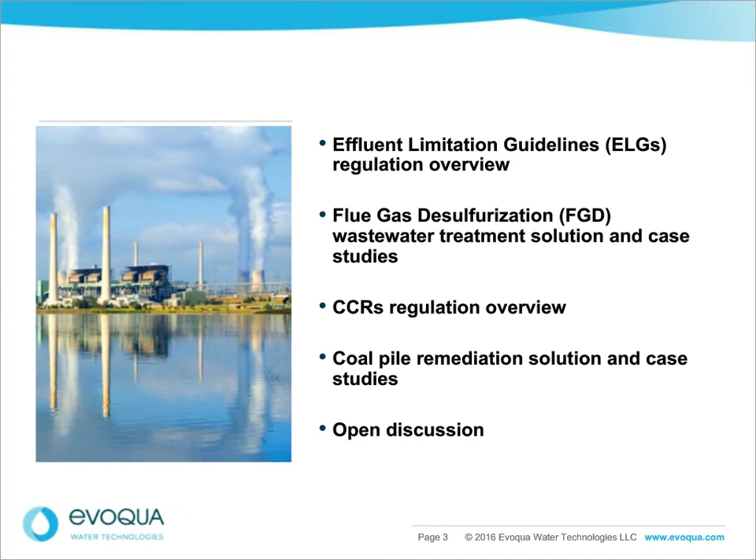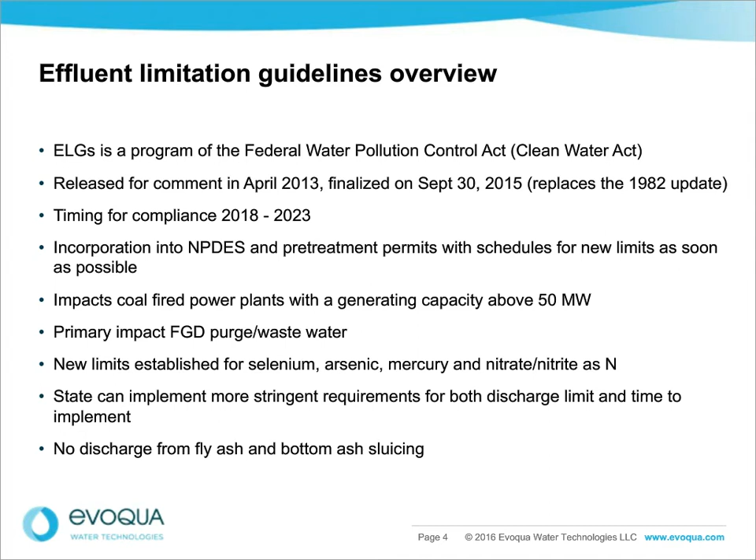The EPA has implemented new regulations for coal-fired power plants designed to reduce the discharge of certain contaminants to the nation's waterways. This 81-page regulation, published in late 2015, addresses 8 different water streams commonly associated with coal handling and coal burning facilities. Sites that have implemented flue gas desulfurization for air pollution compliance will face new restrictions on the scrubber purge or blowdown water, most notably for arsenic, selenium, mercury, and nitrates. Another major change will be the elimination of discharge from ash sluicing operations. This table shows the specific new limits for FGD wastewater.

Per the EPA, these new restrictions are designed to reduce the release of toxic substances to both surface water and municipal treatment facilities. It's worth noting that these are the minimum federal standards, and that state and local restrictions may even be tougher. At the same time as meeting these new limits, power plants will also have to eliminate discharge from fly ash conveyance streams. This will certainly affect the overall plant water balance and create new challenges for water management, water treatment, and operations.

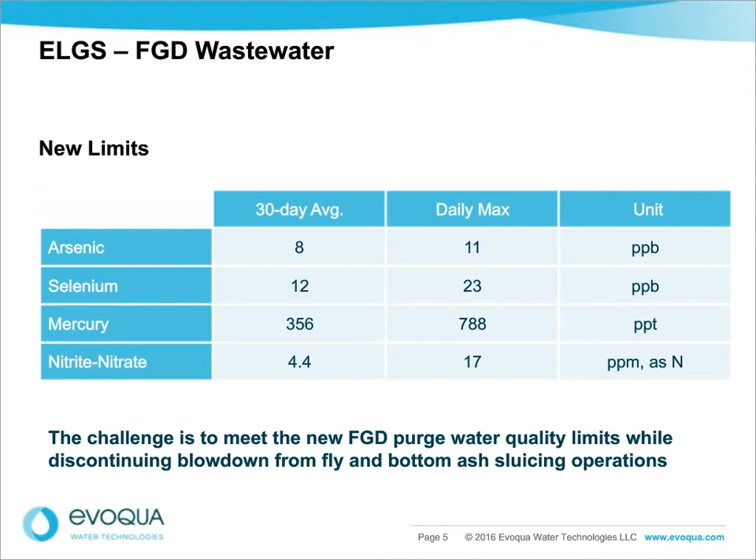The water balance for a coal-fired power plant can be quite complex. This is a simplified drawing of the key waste streams. Mike will discuss the FGD wastewater treatment process in more detail.

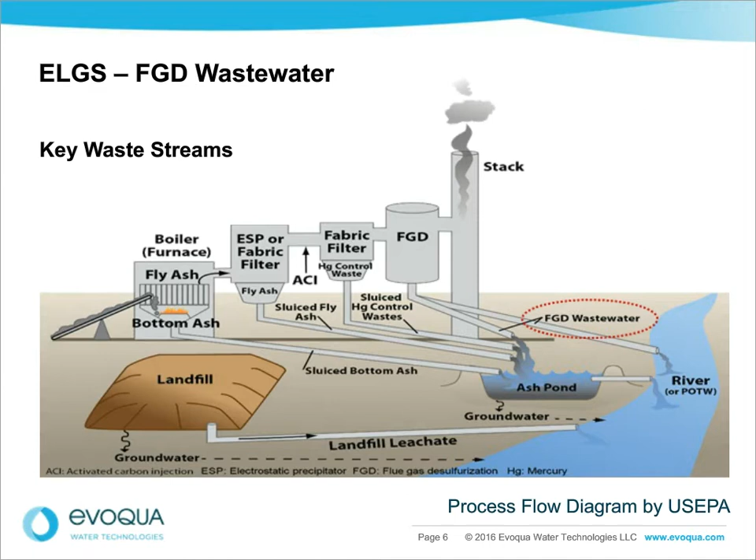Prior to September 30th, where the ELG guidelines came into effect, a typical FGD wastewater treatment plant would primarily consist of a physical chemical treatment process or a settling pond for desaturation of the gypsum and precipitation of some of the heavy metals. However, depending upon the ultimate point of discharge, local NPDES permits may be a little bit more stringent and require total nitrogen reduction or COD, BOD reduction through a secondary treatment process.

Now that we have the ELG regulations in effect, an FGD wastewater treatment plant can and could consist of 3 treatment steps: primary, secondary, and tertiary. The secondary portion for total nitrogen reduction or BOD-COD reduction really plays a part on several factors. Number one is what the NPDES discharge requirements are for that particular utility, or if we had elevated nitrate concentrations in the waste stream.

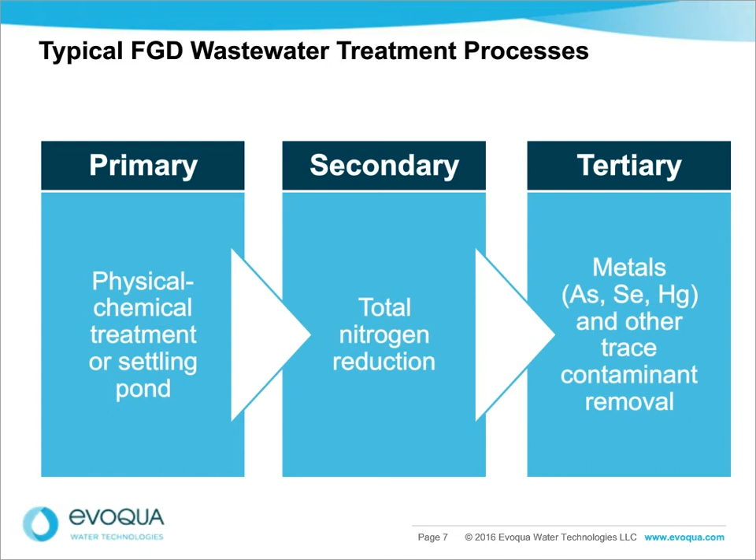The key considerations for an FGD wastewater system in terms of the design, of course, are the influent compositions, the discharge requirements, ELG plus local, the solids handling, materials of construction, and each utility may have a unique requirement in terms of specific instrumentation or control systems.

The major cost drivers for an FGD wastewater treatment plant are the flow rate, the solids handling, and specific discharge requirements for selenium, arsenic, mercury, BOD, COD, total nitrogen, nitrates, what have you. In terms of the solids loading, it's probably the biggest impact on cost.

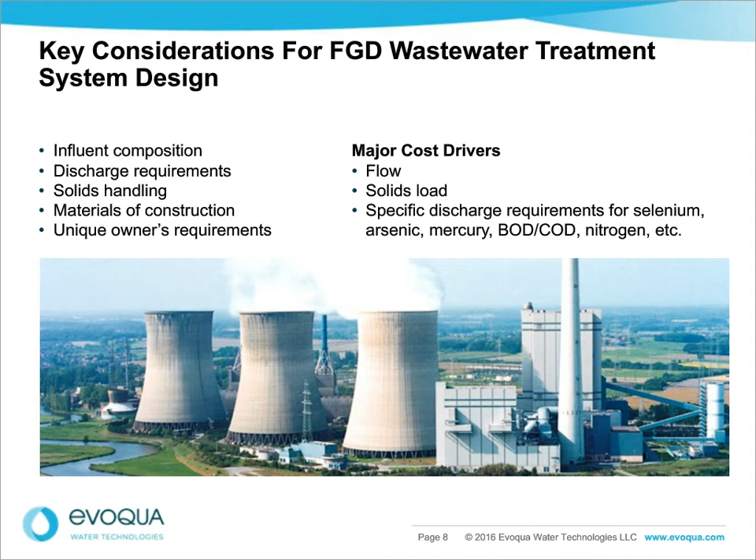In terms of FGD wastewater characteristics, the contaminants are primarily from the coal source or coal blend, the limestone used in the absorber, and also the makeup water. The net impact on most FGD systems is you're going to have high TDS concentrations, high TSS concentrations. You'll have elevated heavy metals. Typical pH range is 5 to 6.5. The purge stream is going to be supersaturated with gypsum, which is extremely scale forming.

The elevated chloride concentrations that we've seen on the facilities that we've executed have ranged from 10,000 to 50,000 milligrams per liter, which, because of that high chloride, can greatly impact the material of construction, not only for pumps and piping, but also for instruments that come in contact with the waste stream.

The nitrate, nitrite, and ammonia concentrations have varied widely. If a utility is using dibasic acid for enhancing the scrubber performance, there would be an impact on COD in the purge stream. Typical ranges are between 500 to 1,000 milligrams per liter. Typical FGD purge streams range from 105 to 130 degrees Fahrenheit.

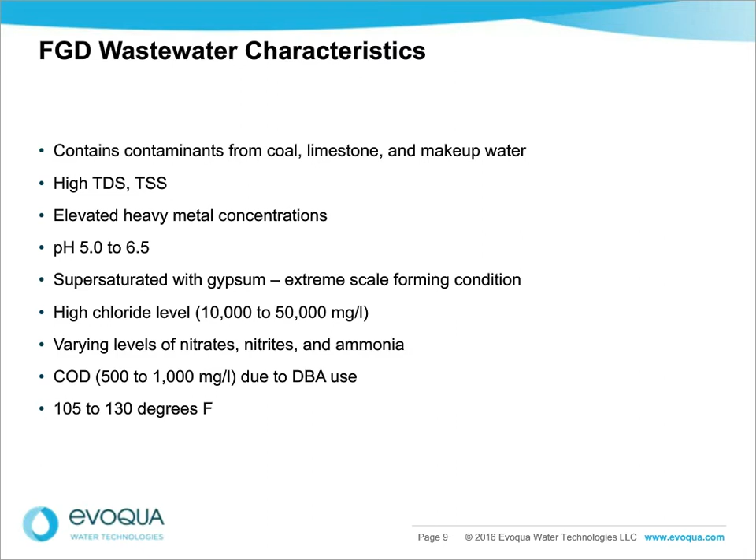The next table shows typical wastewater characteristics that we've seen in projects we've executed and bid. For TSS concentration, I'll focus only on those highlighted in red right now. You'll be given a copy of the presentation so you can look at each value.

In terms of TSS, the ranges we've seen have been 6,000 to 40,000. These higher ranges have been more specified than actual. The impact is pretty dramatic in terms of sludge handling and dewatering requirements. Of the 15 plants we've executed, all but one have been less than 1% by weight, more in a range of 8,000 milligrams per liter. We've had one facility right around 1.5 to 1.6%. The impact is a lot of extra capacity needed in your sludge holding and dewatering.

Chloride concentrations, again 10 to 50,000, impact material of construction for just about any component that comes in contact with the purge stream. Nitrates and nitrites have been very wide-ranging, as low as 5 milligrams per liter to as high as 100 milligrams per liter.

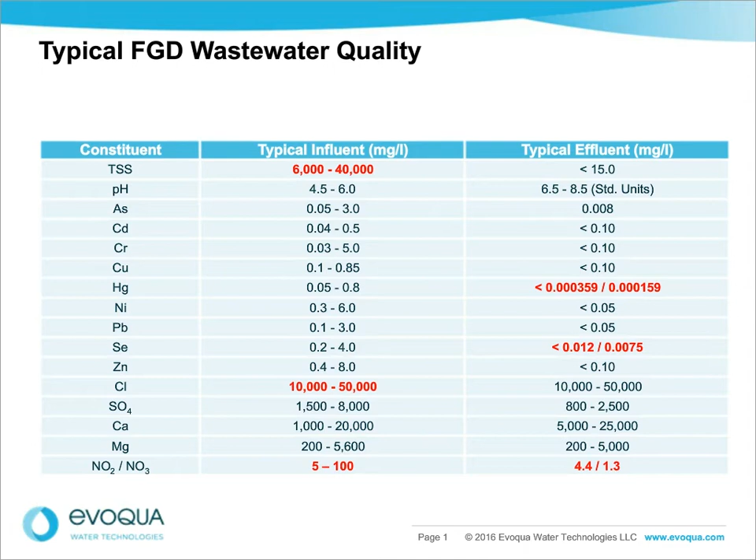A typical physical-chemical treatment plant for the FGD purge stream would consist of flow equalization, two-stage reaction, followed by clarification, pH adjustment, and gravity filtration.

The concept we utilize for the PhysChem plant is to operate the reaction trains at a fairly high solids concentration. We utilize the clarifier underflow and recycle it back to reaction tank number 1. We typically operate at 3 to 5% by weight in reaction tanks 1 and 2.

Within reaction tank 1, we add the hydrated lime slurry along with the organosulfide. Some early versions of the process consisted of 3 stages where we added the hydrated lime and organosulfides in separate tanks. Through R&D work, we determined we could obtain the same performance by adding it in the same reactor, so we reduced it by one unit process.

By operating at 3 to 5% by weight within the reaction trains, we can generate a clarifier underflow solids concentration of anywhere from 11 to 15%. We've had a few even higher, only because they're operating the reaction tanks at slightly higher concentrations.

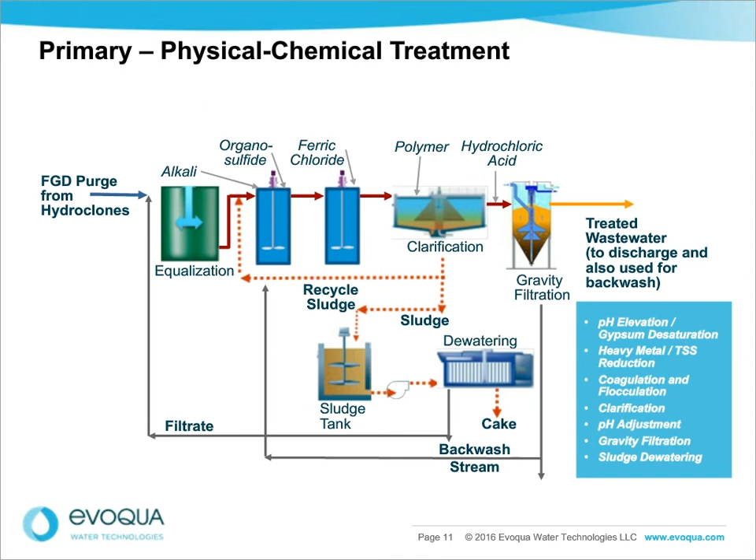Several of the systems we've installed discharge into the Chesapeake Bay, so we had a total nitrogen limitation of 4 milligrams per liter. The process we selected was the utilization of sequencing batch reactor technology.

Because FGD waste streams have elevated temperatures, and you're operating total nitrogen processes in a mesophilic condition, you want to reduce the temperature to an optimum of right around 88 degrees Fahrenheit.

Through plate and frame heat exchangers, we cool the liquid coming in from the physical-chemical plant using a cooling source, and transfer that flow into an SBR influent equalization tank.

An SBR is a batch cycle, utilizing anoxic conditions. We try to maintain a negative ORP of right around minus 250.

We selected SBR technology because influent streams at various plants can change depending upon the coal source, so with a sequencing batch reactor you have a little more flexibility. The process of an SBR is fill, react, settle, decant, and idle.

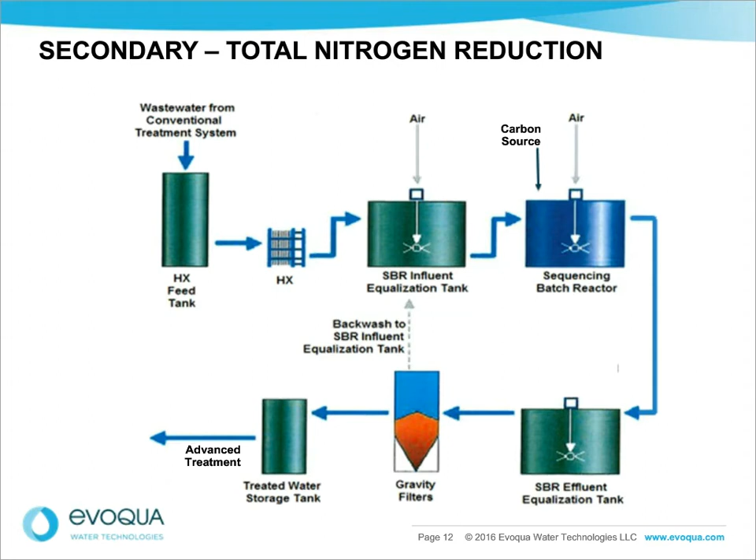The tertiary step for removing metals such as selenium and enhanced mercury typically falls into two classifications: biological or physical chemical.

A few examples of biological processes are a packed bed reactor, fluidized bed reactor, or a moving bed biological reactor. In terms of physical chemical processes, it's through reduction, and we typically use zero valent iron technology for those applications.

You could also consider ion exchange, but FGD typically has so many other background constituents that ion exchange hasn't been that successful for producing the levels of selenium, mercury, and arsenic that ELG requirements dictate.

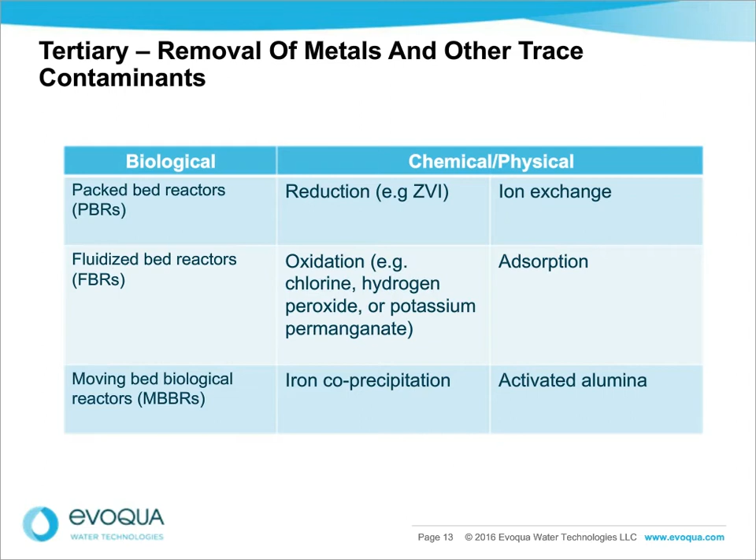We have a case study to provide to the group today. This particular facility was installed in 2007 and provided to Duke Energy. The project location is Belews Creek. I'm sure many of you listening in have read a lot of papers about Belews Creek - it's a very successful plant. Evoqua did it under a consortium agreement, and it was design-build.

The particular facility consists of physical chemical filtration, heat exchangers, and selenium reduction utilizing ABMet technology. In the early days of that technology being developed, we were working with the original inventor, which subsequently sold to Zenon and now resides with GE.

In that particular application, we basically bought the rights to use the technology. We designed and built all of the internals, control logics, and everything else. A few items I'll mention on this particular application: Duke Energy wanted some form of redundancy, and on several parts of the system we developed some unique technologies.

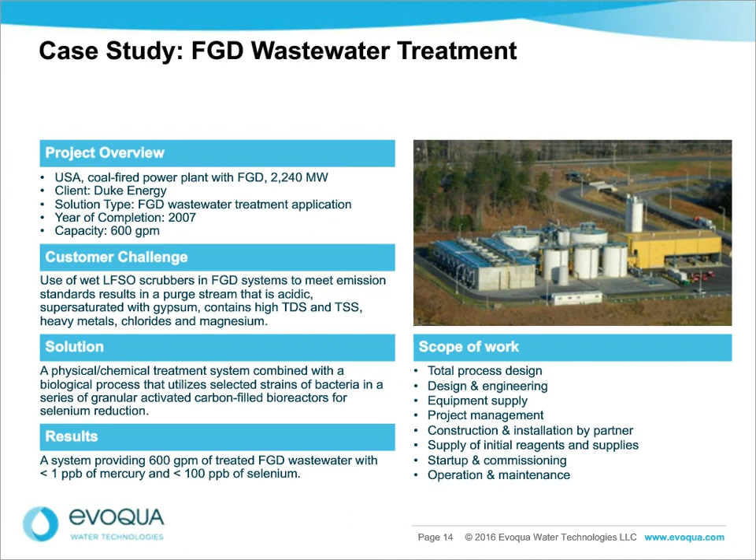Now I'm going to talk about the tertiary step in terms of basic ZVI technology. How does it work? What is it? Zero valent iron, commonly known as ZVI, is elemental or pure iron.

ZVI spontaneously reacts with many compounds such as oxyanions, metal cations, and some organic molecules. The mechanism is somewhat complex, but it's a redox reaction with the ZVI acting as the electron donor, and immobilization occurs through surface adsorption on the iron oxide, produced from iron corrosion.

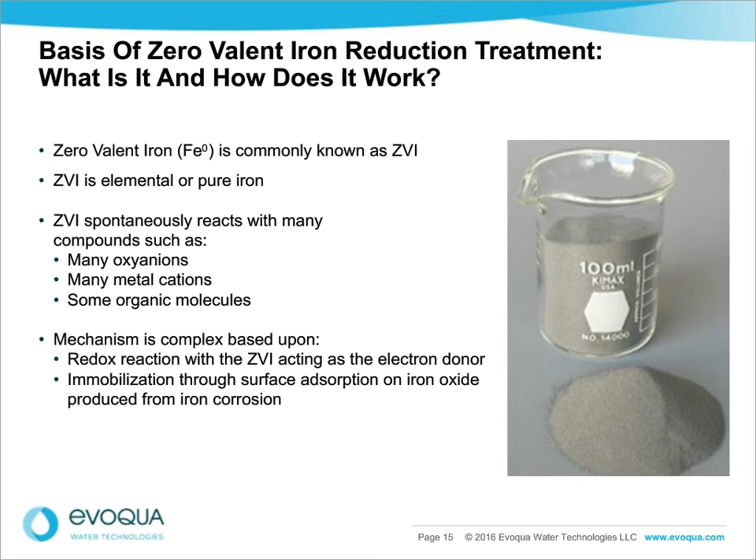Historically, ZVI has had some issues. Primarily, it would rust out and lose reactivity. This reactivity is classified as passivation, and it caused plugging of columns. Many solutions were tried to prevent the passivation, such as acidification, frequent backwashing, packed beds, even nanoscale ZVI. But until recently, there really hadn't been a solution found.

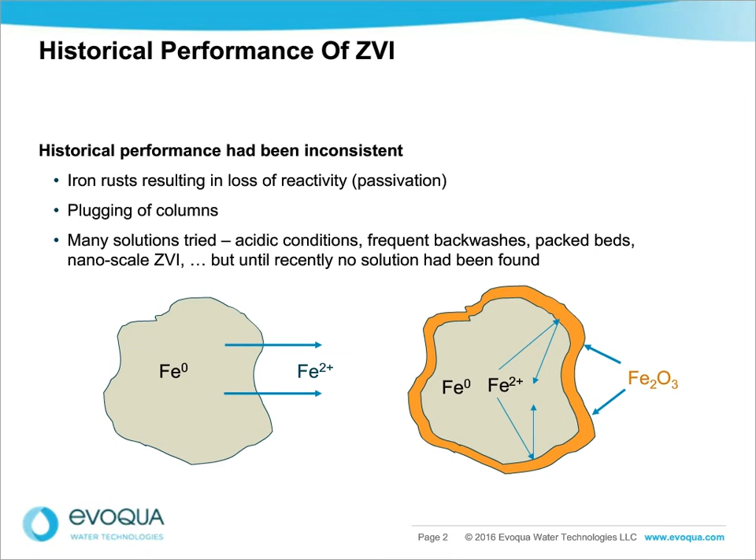What we have done is actually condition the ZVI, or zero valent iron, and form a magnetite coating which prevents that passivation. The redox reaction goes after many oxyanions and heavy metals, such as nitrate, selenium, molybdenum, chromate, silica, arsenic, copper, and mercury. Arsenic and mercury react very rapidly within the reactor, through surface adsorption. In addition, copper, mercury, cadmium, nickel, zinc, and thallium are also reduced.

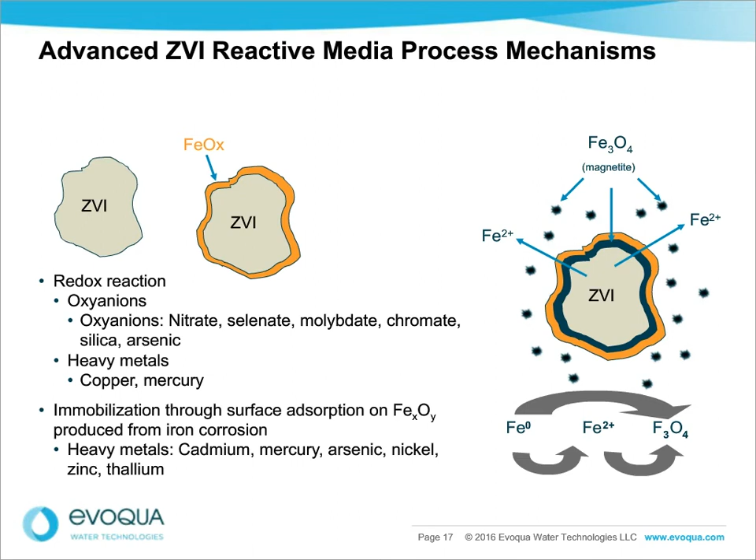A typical advanced zero valent iron reactive media system, which we've termed Pironox, for the removal of metals and other trace contaminants, consists of a 4-stage reactor. We are adding anti-passivation reagents to each one of the tanks to maintain the ZVI.

The reactors are basically a tank within a tank. The inner tank serves as the reactor, and the outer annulus area forms a quiescent zone to keep the ZVI within the reactor. A typical FGD application consists of 4 stages. We provide a means of bypassing any of the reactors should one need to be taken out of service for inspection and or maintenance on any of the agitators.

Following the 4th stage, we transmit the flow in a gravity flow system to an oxidation tank. What we're doing in the oxidation tank is converting the ferrous to ferric, which subsequently will precipitate out. We're doing that oxidation through aeration.

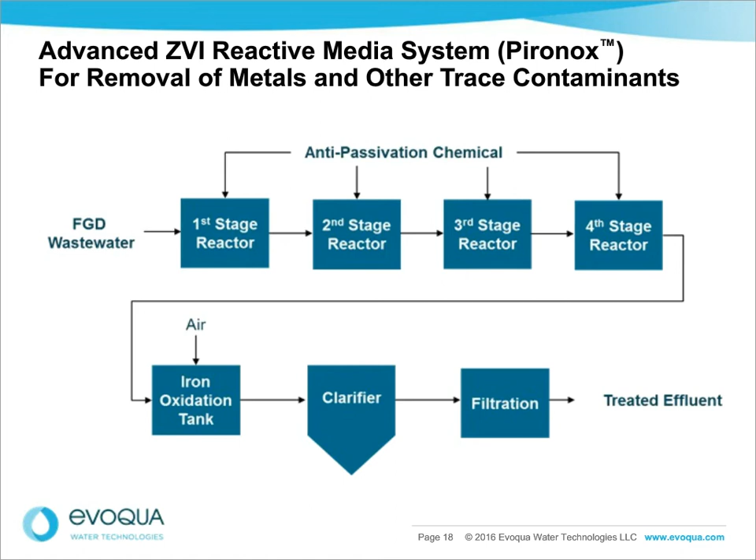An example case study of the Pironox process: we have an ongoing system being tested at an East Coast utility. The design on the facility is 20 GPM. The results from this ongoing testing have proven out that the Pironox process can meet the ELG regulations based on a 30-day continuous performance, not only in arsenic and mercury, but also nitrates and selenium.

I know one of the questions is going to come up: how much ZVI is required in a system? It really depends on several factors, flow rate, of course, the concentration of selenium, and also the concentration of nitrate. Typically, order of magnitude on a conventional FGD system, based on having around 25 milligrams per liter of nitrate, you're looking at a range of 250 to 400 milligrams per liter of ZVI for dosage rates.

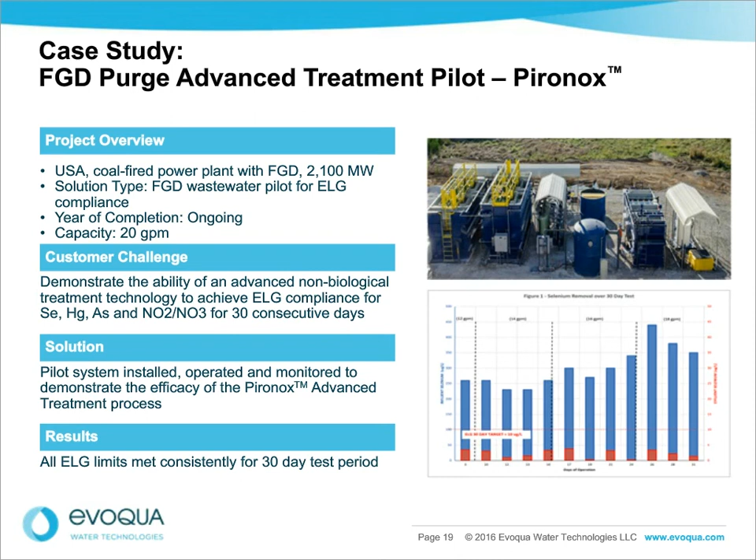In summarizing the physical, chemical, and total nitrogen polishing effects, the influent composition of the waste stream greatly impacts the design. Discharge requirements, of course, depending on local NPDES permit requirements, can greatly impact the design requirements of the system also.

Sludge handling, I think that's really the key aspect of an FGD system design. We've done 15 facilities, and a lot of them have been over-designed in terms of solids handling, only because when the design was done, they were looking at various coal sources and took the worst of each one, and instead of designing for less than 1% or 1%, it's typically been up to 4%, which is dramatic over-design.

Materials of construction, I can't stress that enough. You really need to take into consideration what the chloride concentration is, what the right metallurgy is going to be, or wherever possible, use non-metallic.

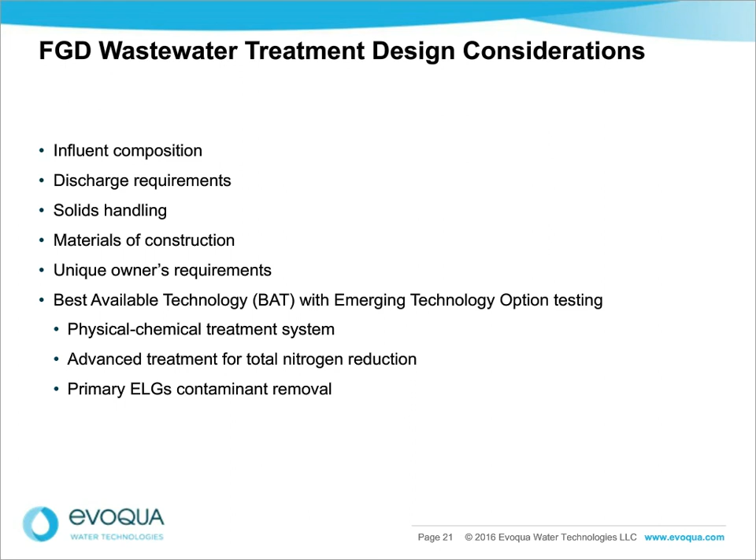Thanks, Mike. You're welcome. Thank you for concentrating on the FGD purge water and the ELG limits.

Another set of regulations impacting coal-fired power plants is known as CCR, which stands for Coal Combustion Residuals. It was promulgated from the Resource Conservation and Recovery Act, and it deals with the solid byproducts from burning coal, such as fly ash and bottom ash.

Per the previously discussed ELG regulations, these materials can no longer be sluiced to an impoundment with an overflow for discharge. Dry handling or closed loop systems will need to be installed to move and dewater these solids.

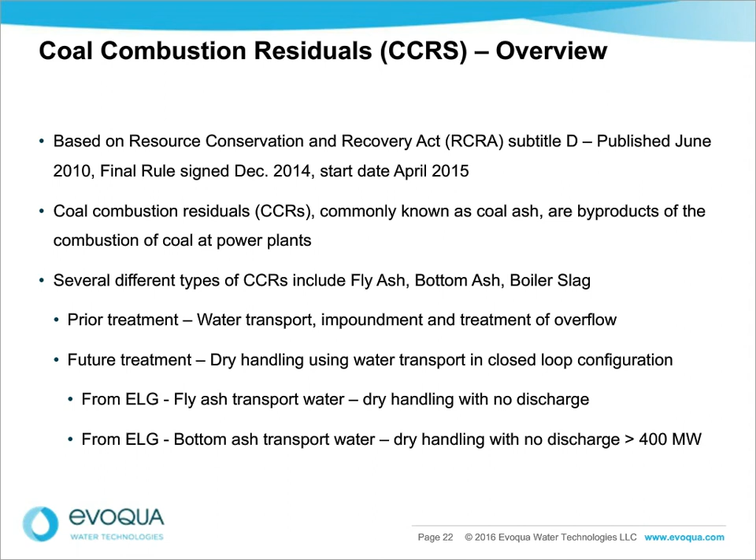Many plants have combined use impoundments for ash, FGD purge water, and low volume waste settling. The discontinuance of ash sluice water flow to these ponds will change the plant's water footprint. Some plants will implement new FGD physical chemical treatment systems, leaving the current ponds largely inactive. Other plants that have been idled or repowered with natural gas will have ponds that need to be dealt with in the near future.

Impoundments must be evaluated for several reasons: location restrictions, if they're too close to a seismic area, a navigable waterway, an active aquifer, or a residential area, they may require closure. Also, ponds will need to be evaluated for structural deficiencies, including liner integrity.

Groundwater monitoring will be required for ponds that remain in use. Certainly, a large number of ponds will require closure plans and actions to be implemented in the near future.

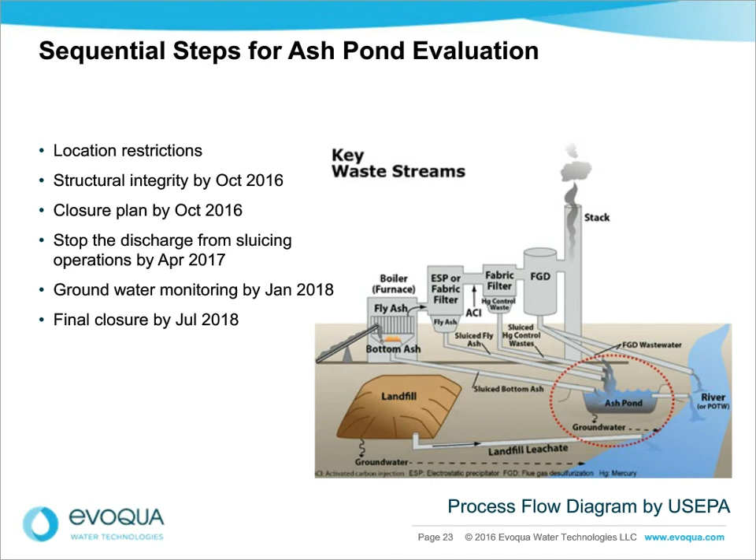The variables for pond closures are much the same as for any wastewater treatment application: water quality in and out as dictated by the local NPDES permit, the volume to be evacuated, and the timeframe in which it needs to be accomplished.

All discharged water will need to meet pH, total suspended solids, and oil and grease limits at a minimum. The free water at the top of the pond will be easily clarified and filtered with typical mobile water treatment equipment. Where tighter restrictions exist for metals or nutrient removal, more extensive treatment will be required. Activated media such as Pironox, wastewater ion exchange, and fine filtration may all be necessary to meet future limits.

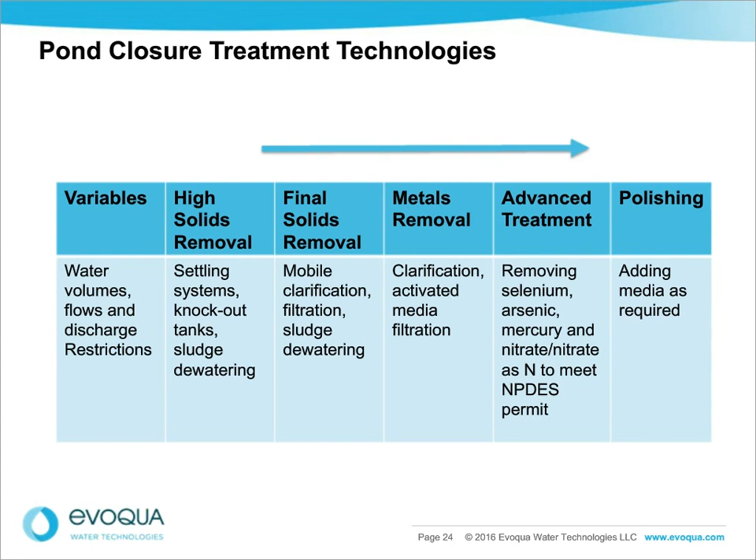Let me give you a couple of case histories where treatment has been successfully put in place. A Midwest utility faced an emergency situation when heavy rains took their ponds to within inches of overflowing to the Mississippi River. A mobile clarification trailer was dispatched and operating within 48 hours. The added treated flow capacity lowered the water level to a safe point while consistently meeting their TSS limits.

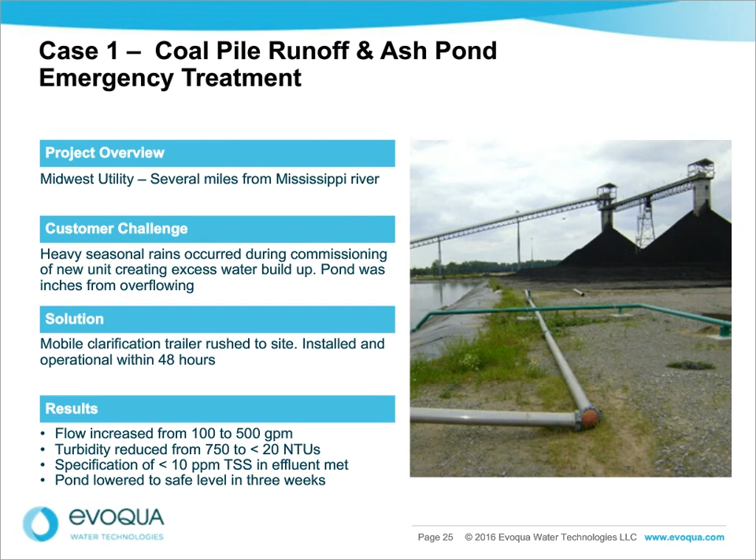Several current projects are underway at this time that go even further, addressing arsenic, mercury, selenium, and nutrients such as nitrate.

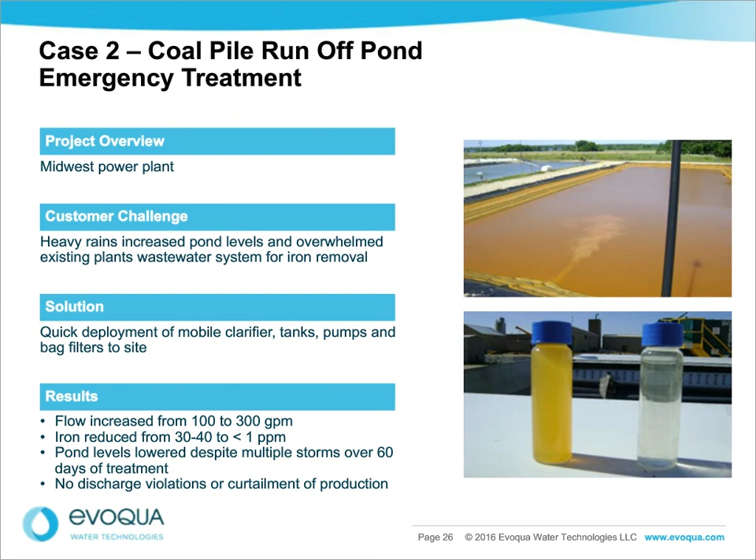So what do our clients, customers, and operators need to do now? Start early—it's never too early to start planning. Pick knowledgeable partners, people that have experience in the industry and with these types of applications. Evaluate all of your options. Test your hypotheses and make critical decisions early so that implementation can match timing and performance criteria.

Thank you for your attention this afternoon. The moderator will now open the question and answer portion of the webinar. Thank you again.